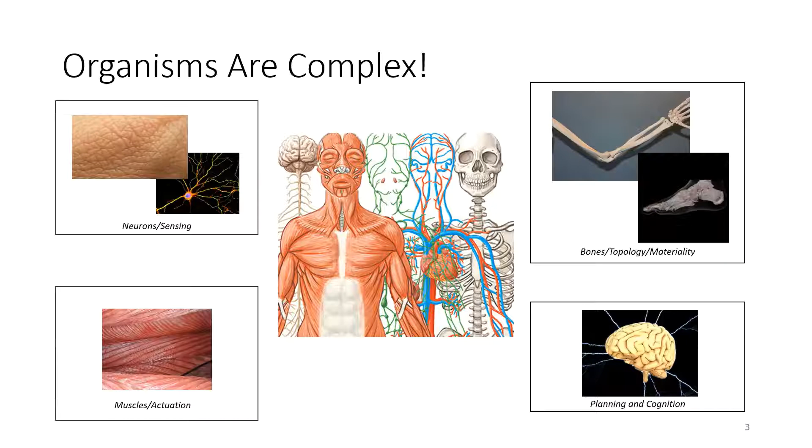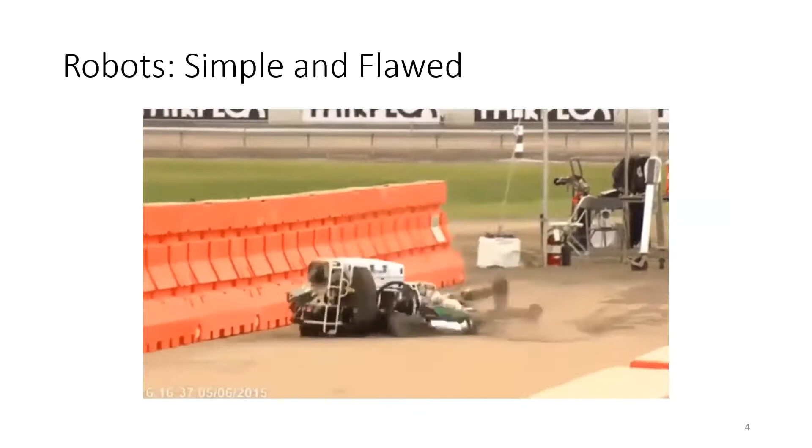Meanwhile, by contrast, this was the state of the art in robotics 6 years ago. And this was actually a huge win. I'm showing the failures here, but this was the DARPA Robotics Challenge where robots were able to solve a number of tasks. But here, if you look at all the different failures, you also see how much further there is to go. Robots fail on a lot of more simple tasks.

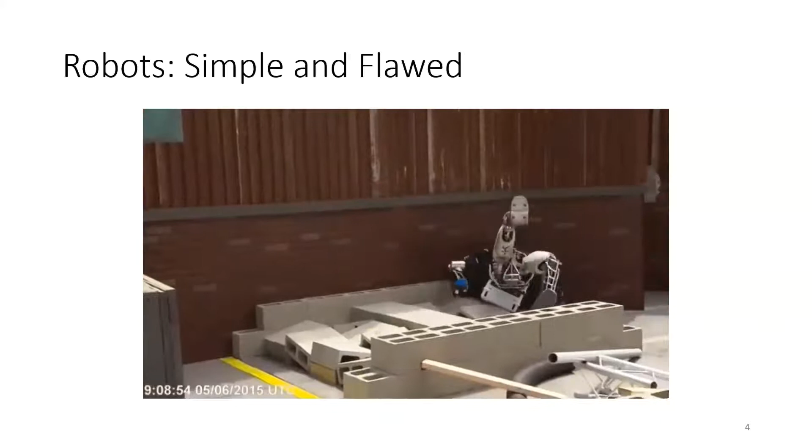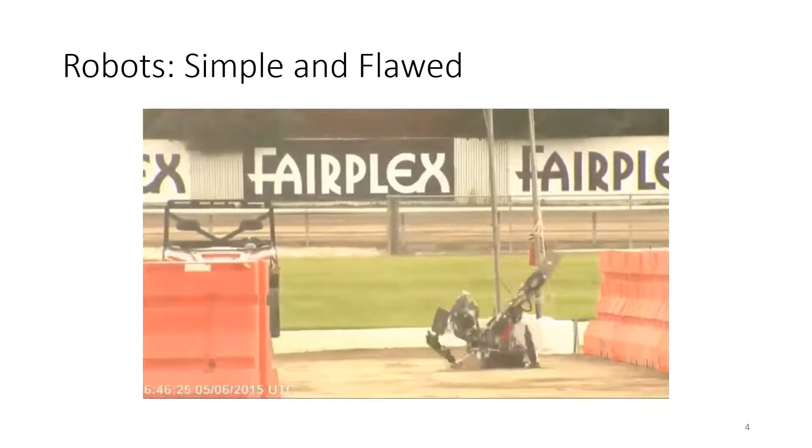And if you watch, this was a competition for humanoid robot designs, and you'll see that many different teams had their own robot design, but they all feel a little bit suboptimal here, right? There's no richness of the organ systems that you see in biology. They're a little bit rigid, they're a little bit clunky, they move funny, they have little integrated sensing. And part of that is because of the way in which they were designed.

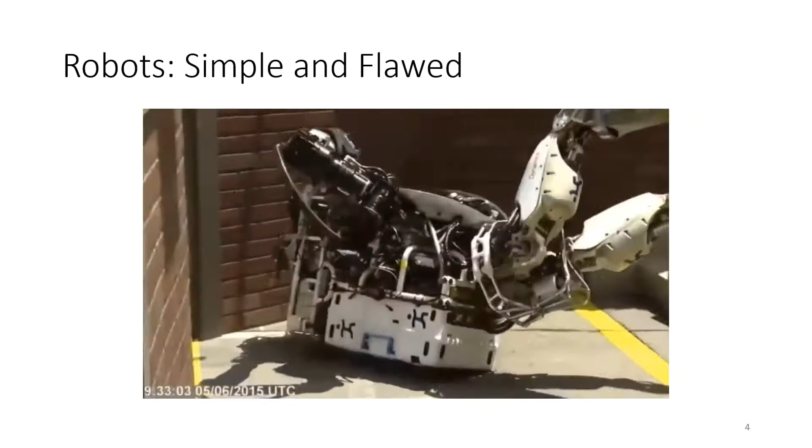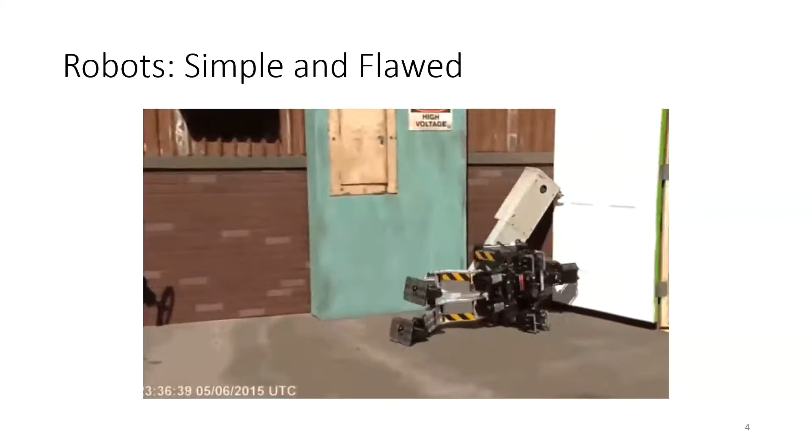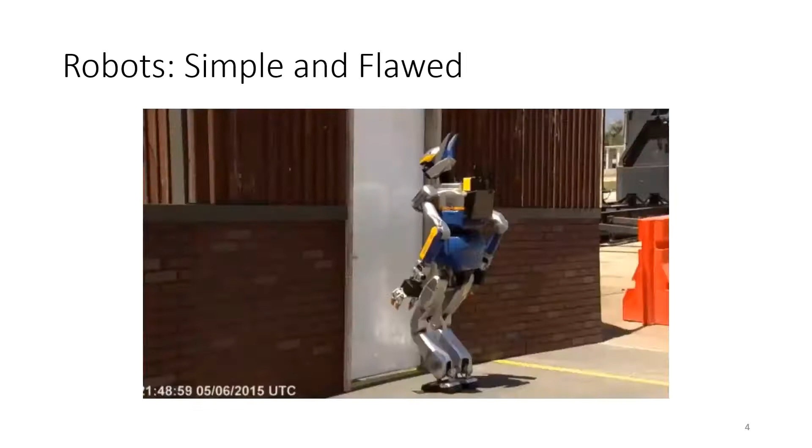These robots are really, really expensive. And once the body is built, the teams had to do the best that they could with the robot's morphology, hell or high water. I should also stress that these bodies weren't necessarily designed specifically for the tasks that they were meant to solve. They had to solve a number of tasks, and people were doing this mostly from a biomimetic standpoint.

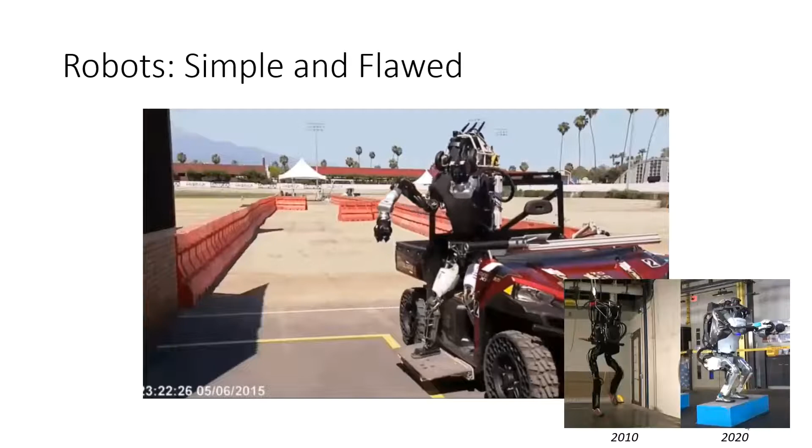I'd like to take this moment to make one more point. This on the bottom right here, this is Atlas. This is one of the robots that was used in the challenge. On the left, you see 10 years ago, and on the right, you see today. And if you've seen the videos from Boston Dynamics, you know just how far their humanoid robots have come in the last 10 years. But from another perspective, you can say it took 10 years to build something that still struggles to do everyday tasks, such as construction, cooking, etc.

And if design cycles are this slow, how many more decades is it going to take to get a diverse future of robotics?

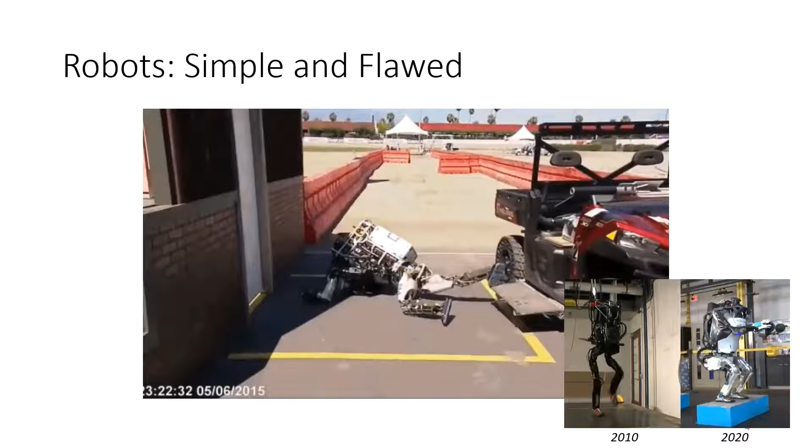So why did teams struggle so much in the DARPA Robotics Challenge when the robots failed? Well, as I hinted before, current workflows for robot design are extremely slow. And that's particularly because people are working on spiraling linear workflows.

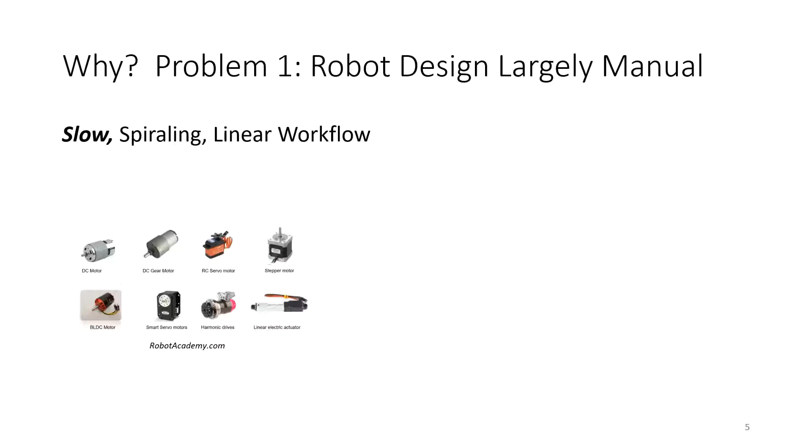And what I mean by that is that first a designer develops a conceptual design of how they want the robot to move. And based on that, they select the actuators they want to use for a task. Then they design the body to house those actuators and define concretely how the robot will move. And then they program it with control or higher level AI reasoning. And if they realize then that the robot is not performing as desired, they may need to revisit as early as actuator selection and repeat the process.

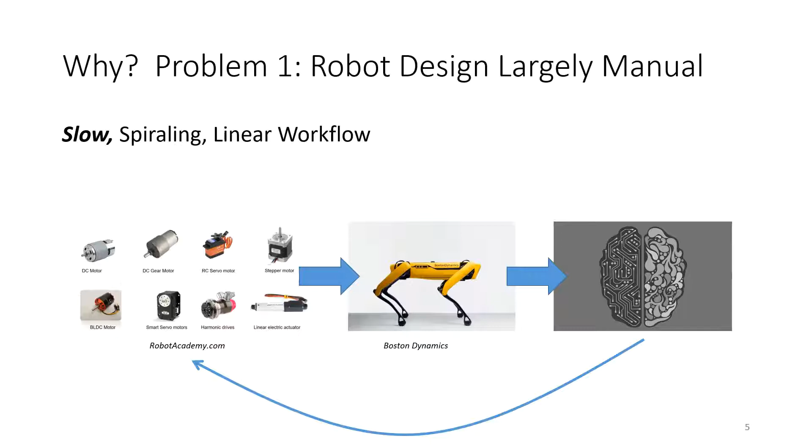This is slow, hardware intensive, and suboptimal. As a bit of a corollary of this, because mistakes are so expensive, designers tend to play it safe, and they stick to what works. Here's a handful of quadrupedal robots that have come out over the last few years, and it really does feel like every other month, somebody is releasing a new quadrupedal robot.

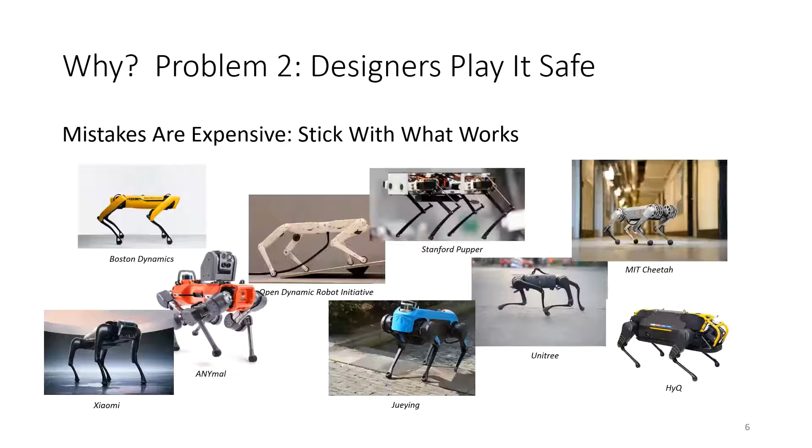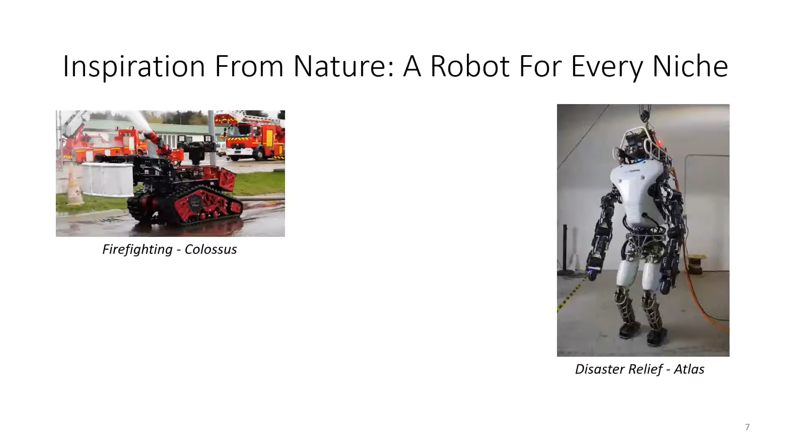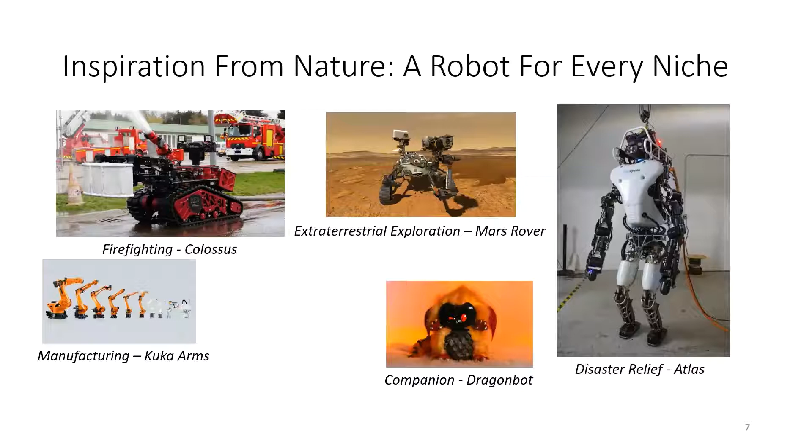And while this is cool, this isn't quite the diverse future of robotics that I was hoping to sign up for. The dream of a robot-filled future is one that takes inspiration from nature, where a robot fills every niche. And while we see some different morphologies that get some attention, some more than others, particularly humanoids and robot arms,

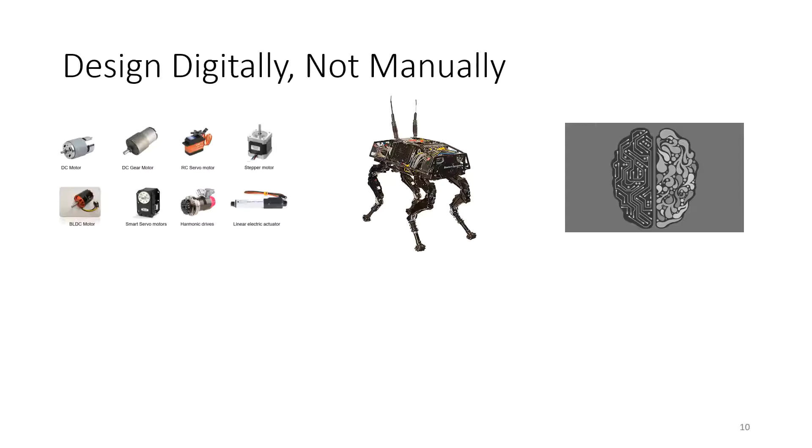My research, though, is specifically focused on developing a workflow where all aspects of a robot are co-designed and co-optimized at once to build a sophisticated robot that can solve specified tasks, such as robustly traversing uneven terrain. The thesis is this: algorithmic tools can be used to vastly accelerate the design and fabrication process of rigid and soft robots in a single CAD/CAM workflow by jointly reasoning about all aspects of robot design in a single physically predictive pipeline. Here's the view from 40,000 feet.

For the purposes of this defense, and the fact that I only have about an hour to talk to you all, I'm focusing on 4 main contributions of this talk. Each will add a new layer of complexity to the co-design tale, although each also brings its own unique contribution. We'll start by talking about how do we co-optimize robot shape, then materials and proprioceptive models very briefly, and then we'll end by talking about how do we optimize robot sensors.

But in every single one of these contributions, we're not just going to be optimizing over these one domains, but we're actually going to be adding other domains to the mix, so co-optimizing over things like control and motion and actuator selection.

These contributions have been solidified in 4 main papers that I'm going to talk about, and most of this work will be simulation-based, but with an emphasis on being physically accurate so that the robots designed by these algorithms may be fabricated in the hopefully near future. But I'll touch upon some fabrication results throughout this talk. So without further ado, let's get started.

And I'd like to start by actually going a little bit deeper into why co-optimization algorithms are necessary to begin with. I want you to look at this, this cartoon hexapod.

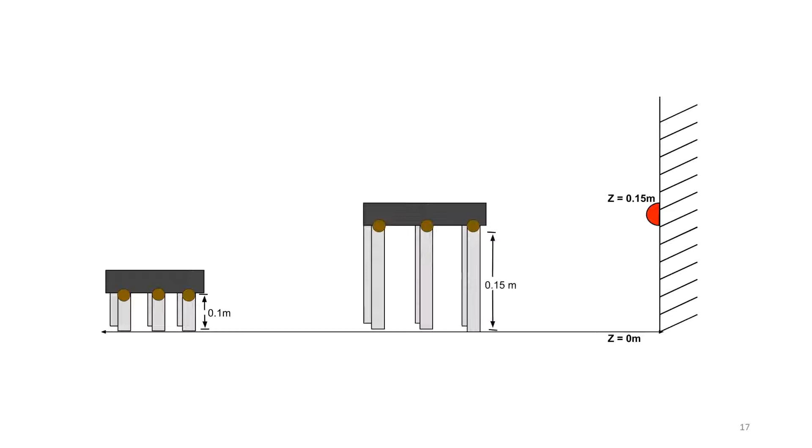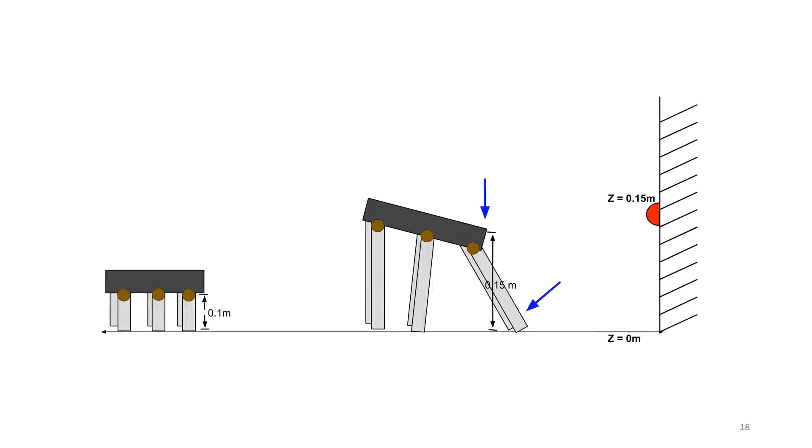But something happened when we made the robot taller: we've changed the dynamics of the robot. We've changed the forces that are going to be applied and the torques that are going to be applied due to the motors and by gravity. And not only did we change the dynamics of the system, but we also changed the kinematics as well. So the robot went from having a short stride to a much longer stride.

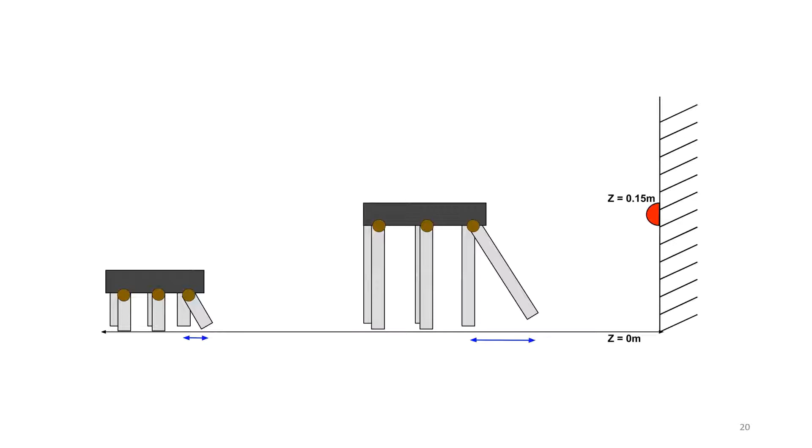And as you change the dynamics of the system, it means that necessarily you're going to have to revisit the control. If you change the control, you might need bigger or smaller actuators. If you change that, you might need a bigger body to house the actuators in. And this all leads back to our spiraling workflow.

So let's talk about our options when it comes to robot design. First, one of our options would be manual workflows. These are what we talked about before. They're slow, spiraling, expensive. We're not going to be about that in this talk.

Another option that we could have is alternating optimization. So this is very similar then to the manual workflow of that spiraling and expensive, but rather than manually going and designing each aspect of the robot and going back and then revisiting each aspect, we're going to computationally optimize each aspect. So we'll optimize control, and then we'll optimize the body shape, and then the actuators, and then we'll go back to control. This sounds like a pretty promising direction to go, but sometimes it leads to problems.

It can lead to poor local suboptima, since only certain bodies are compatible with certain controllers. So this is a little bit better, but I think we can do still even better.

The way we're going to focus on in this talk is full co-optimization, where we solve for the best body, controller, and actuator simultaneously in a single optimization workflow. But there's a challenge here, it's hard enough to solve motion, and now we're saying we want to solve for motion, control, and actuators.

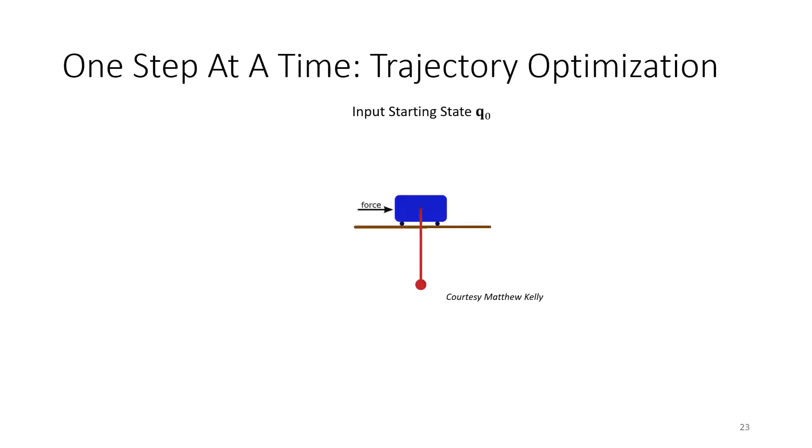Our solution is rooted in something called trajectory optimization, so I'll briefly review that now. Given a starting pose of a robot and a target pose you want it to reach, and maybe some constraints such as maximum actuation limits, trajectory optimization finds the actuation input for every time step such that when simulated, the robot reaches the goal. This is feasibility, can we find a path that reaches the goal, such as this cart pole swing up.

But sometimes you want to do a little bit better because there are lots of different trajectories which can solve a task. So you can also optimize over things like maximum power consumption of a motor, average power consumption, or maybe you just want to solve for feasibility. We can solve these problems more efficiently by converting them to the direct transcription form. I'm not going to focus on all the details here, but just note that we can solve even for things with contact.

The key to solving these types of problems is that we need to compute the gradients of all the constraints of the system, which means we need to compute gradients of the dynamics with respect to all of the decision variables. We need to determine the gradients of the dynamics, gradients of the contact constraints with all variables, and also reason about state and actuation. Algorithms for solving this are pretty well understood at this point for control.

What we proposed in this paper, our core contribution, was the realization that you can also add design variables into the trajectory optimization framework, which we call parametric trajectory optimization. This is possible because the dynamics and all the constraints of these problems are smooth and continuous in the space of design parameters, which makes that co-optimization solvable with gradient-based methods.

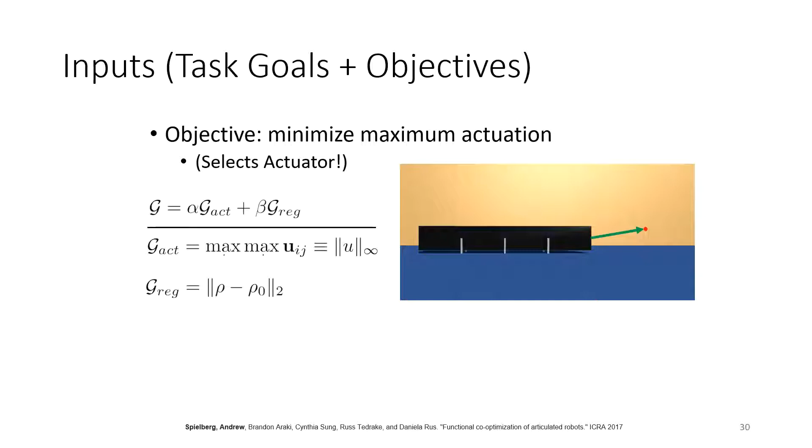We also have two objective functions which we add together. We try to minimize the maximum actuation, which is particularly nice because it allows us to choose the smallest actuators necessary. We also regularize this with respect to design parameters to keep it as close as possible to the designer's vision. As outputs to the system, you get an optimized robot morphology, an optimized robot controller, and it also selects the actuators via the objective function.

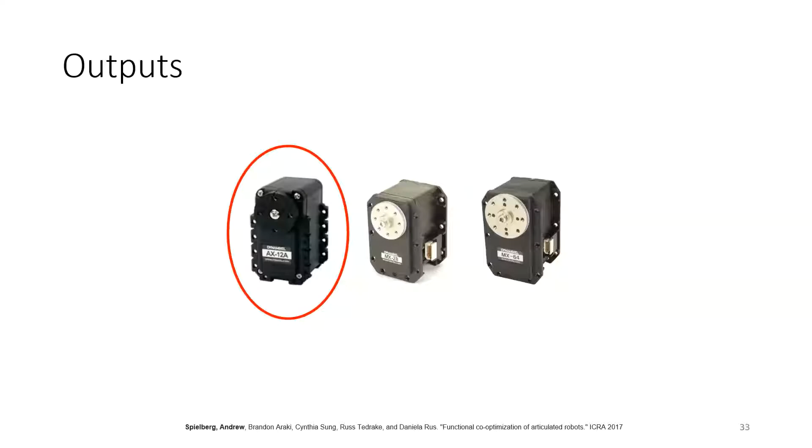So let's get to the fun results. In this example, we have a rigid hexapod that's going to try to hit a button that's too tall for it again.

In all the examples you're going to see here, the robot was actually unable to solve the problem in the default configuration. We always made the robot too short, or too heavy, or usually both.

Here you'll see a task where the robot clears the step, and actually there's only one configuration of the links that works here. The top links have to be shorter so that the robot can lift its leg and not collide with the step.

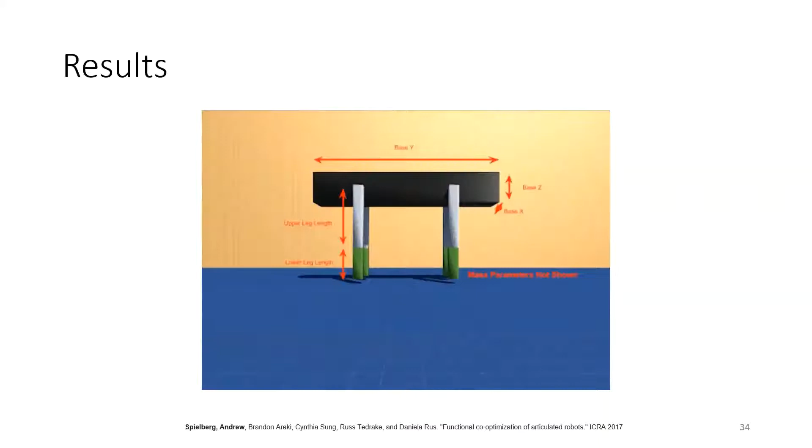Here's an example where we did a quadruped, and we'll optimize this over two objectives. First, energy efficiency, so we can choose the smallest actuators necessary.

In the second example, this is just the same video twice, just to show that we optimized it for a quickly moving gait.

Finally, in probably the most challenging example here, this is called either the scorpion or the squirrel, depending on what you see. We have two constraints: we want the tail to hit a certain point, and we want the front of the body to hit a certain point. We also put joint limits on the tail so that it can only bend a certain amount — I think it was like 60 degrees or something.

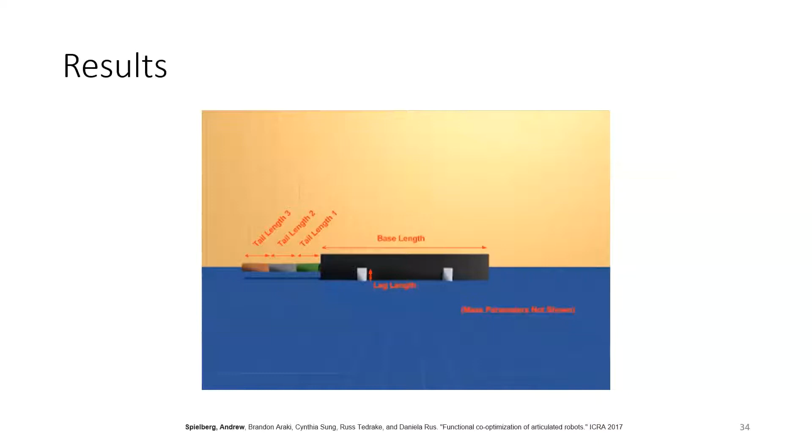There's actually only one configuration of the link lengths that can solve this task. So that was pretty exciting that it's able to find that.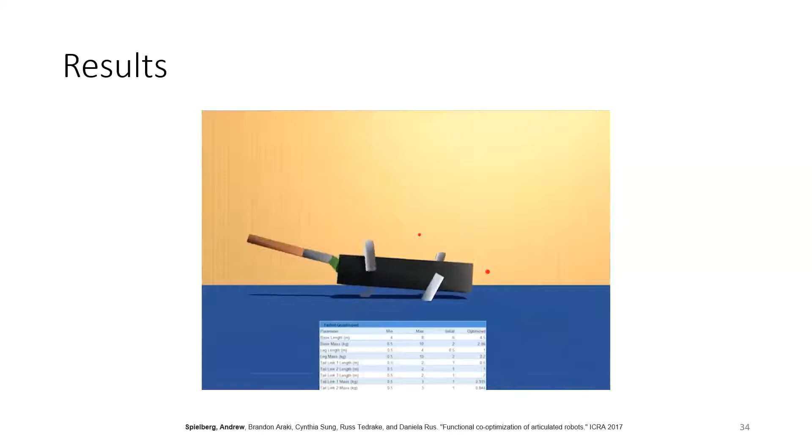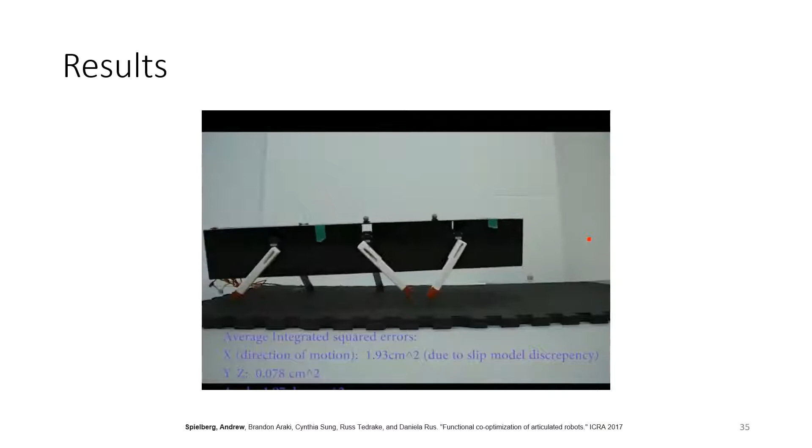So if you're the evil empire, you might want to optimize your AT-ATs to crush the rebel scum. One of the cool things here is that the AT-AT, as it's going up the ramp, wants to stand up.

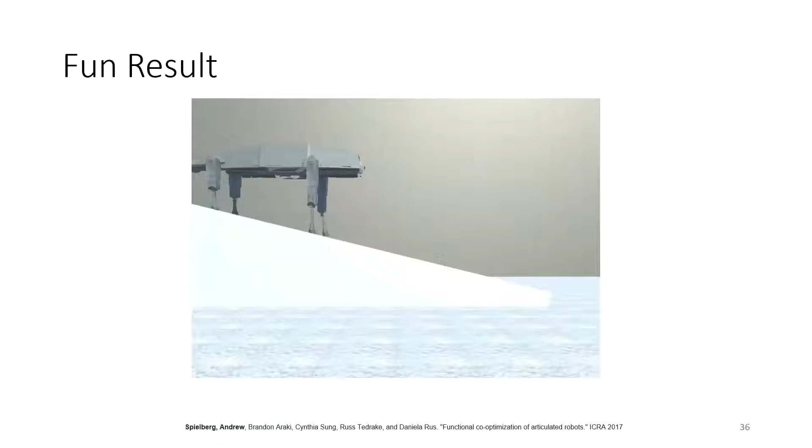So the solver actually optimized to find longer legs in the back and shorter legs in the front, so that it can still stand upright while it's on the ramp.

In conclusion, we're able to co-optimize over the skeleton, going back to our idea of optimizing these optimal organisms. We've shown that we're able to optimize over the parameters of a skeleton, control, and actuators. And design optimization can transform what are normally specified as infeasible problems into feasible ones.

This is made efficient through gradient-based methods, and here we specifically use symbolic differentiation. But nature isn't fully rigid, and compliance and elasticity are important features animals use to solve these tasks.

Which brings us to our second contribution, where we focus on materials and soft robotics, which have much richer dynamics and many more degrees of freedom than rigid robots, both for control and for design.

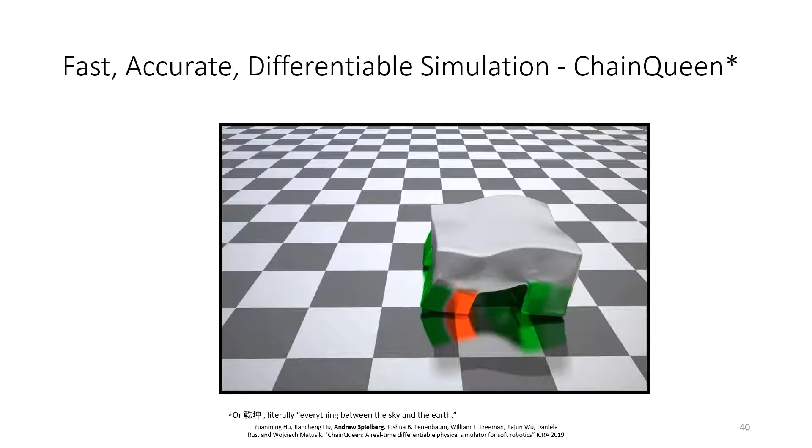Specifically, to solve this, we're going to present a fast, accurate, and differentiable simulator, which we call ChainQueen, meant for soft robotics. I want you to pay attention to that third word there: differentiable. What do I mean by differentiable simulation?

Simulation looks like this. A soft robot is inherently an infinite dimensional creature. If you take any soft object, a piece of elasticity, you can see that any point could theoretically be stretched in any direction. So any point in the body can deform in an infinite number of ways.

Rather than try to reason about this entire beast, we use what's called an observer function, where we feed a reduced state of the robot, a short summary, into a controller. For the purposes of what you're going to see here, the observer we use is just clusters of the soft robot, and we average their positions and velocities, feeding that in as a summary.

That summary can be fed into a closed loop controller, which generates an actuation signal based on the state, which can then be used in a forward simulation step. After stepping the system forward for the length of the simulation, we summarize the robot's behavior with a loss function, which we seek to optimize.

Example loss functions could be something like energy usage, which you saw previously. But for soft robots, we're actually going to do this in an unconstrained fashion — I can talk offline if you want to know why we choose unconstrained optimizers here. So our objective is usually going to be something like how far forward does the robot walk.

After we simulate forward, we perform what's called a backpropagation step, where we compute the gradients of the loss function by applying the chain rule recursively back to the start of simulation.

And then we feed those gradients into any first or second order optimizer. Now, part of what makes a simulation differentiable is that any variable of the system can be differentiated with respect to any other variable. Differentiable simulation is a bit more powerful than the symbolic gradients that I talked about earlier.

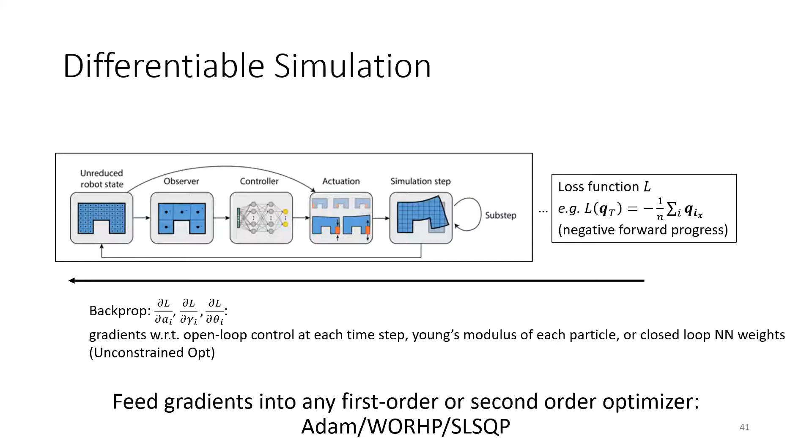Since differentiable simulation can have a more complex program structure, it can have things like if statements and for loops. Now, you may be wondering why I suddenly started talking about simulation. Well, it's because the differentiability of simulation is so important in solving soft robot co-optimization tasks. And also, we're going to be using this simulator for the remainder of the talk.

Now, I said that the simulator was differentiable, accurate, and fast. So why do you care? First of all, when you have differentiability, you have gradients. Like I said, you can use continuous optimization. And that really allows for some exciting applications in control, system identification, and design optimization.

Second, if it's accurate, it gives us promise that we can actually fabricate these robots in the future. And third, simulation is always the inner loop of any design algorithm. For each iteration of an optimization algorithm, you're always going to want to simulate your robot to see its performance and compute gradients in order to know how to update the system. So the faster you make the simulation and the gradient computation, the faster that you actually make your optimization algorithm.

Another thing people ask me is, why do we actually care about using differentiability for control? I've heard about this cool thing called reinforcement learning. Everybody's using it these days. Reinforcement learning is really powerful, especially for rigid robots.

But we've actually shown that if you use model-based differentiable simulation and use the gradients from that, it's possible that you can actually improve the robot up to 10 times faster for control than reinforcement learning. And even for situations where there's contact, it becomes even trickier. I'm yet to see that much research really showing that it's feasible to use reinforcement learning on walking soft robots.

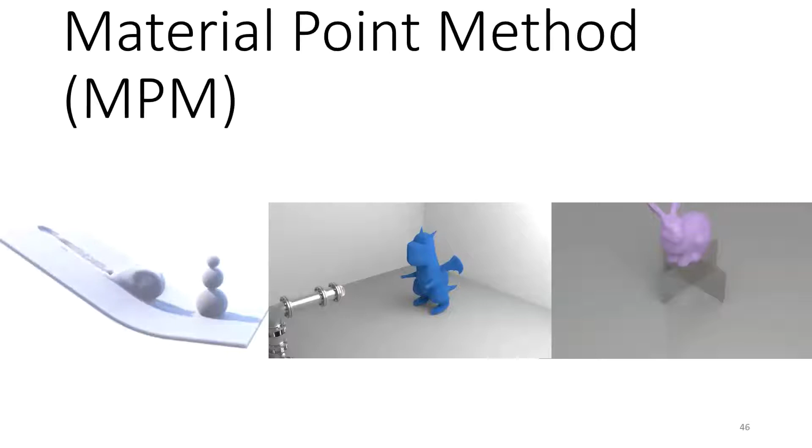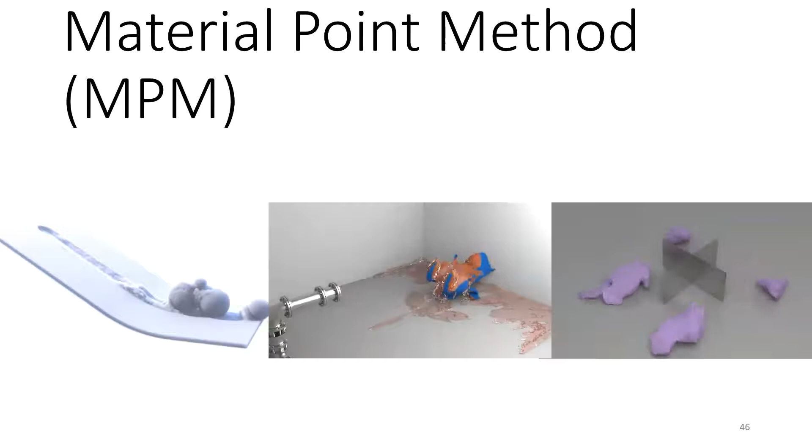by Disney. It can handle fluids and elastic coupling. It can even handle things like fracture, which is a feature or a bug, depending on how you think about it. And it's physically based, which makes it really perfect for soft robotics.

MPM is a hybrid particle grid simulation method. So particles are the main representation of the geometry, but for each time step, they're rasterized to a grid and advected. While on the grid, elastic forces are applied between neighboring grid cells, momentum is updated, contacts and collisions are resolved, and then the system is resampled in its particle form and is advected forward in time.

Most of the time throughout this talk, you only have to think about this as a collection of particles, as if these are the atoms that are making up an elastic body, but occasionally we'll talk about the grids.

Now, MPM by itself isn't new, but what we've done here is we've added the ability to compute gradients of any output of a simulation step with respect to any input, and we put it on the GPU to make it very efficient. And obviously, the idea of differentiability isn't completely new.

For people in the audience who are familiar with deep learning, differentiability is what powers these learning systems today. And if you are familiar with deep learning, you can think of a single step of simulation as you would a single layer of a neural network. In this sense, a differentiable simulation is really just a highly nonlinear deep neural network.

Okay, now let's get to the demonstrations. As a first motivating example, we're going to show how gradients can be used to infer physical quantities. So here, ball A will collide into ball B, and we want ball B to land at destination C. This is going to be, where the ball lands is going to be a consequence of momentum and conservation of momentum. So we define a loss function, which is how far does the ball end from the observed destination?

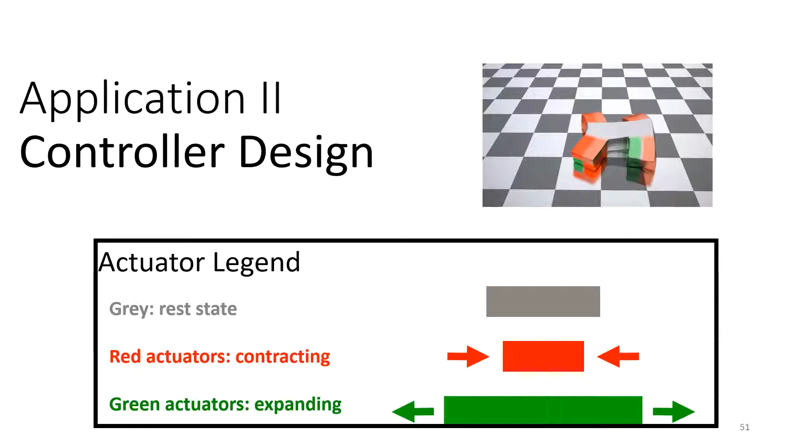In this example, we're using pneumatic actuators, where the red actuators are currently contracting and the green ones are currently expanding.

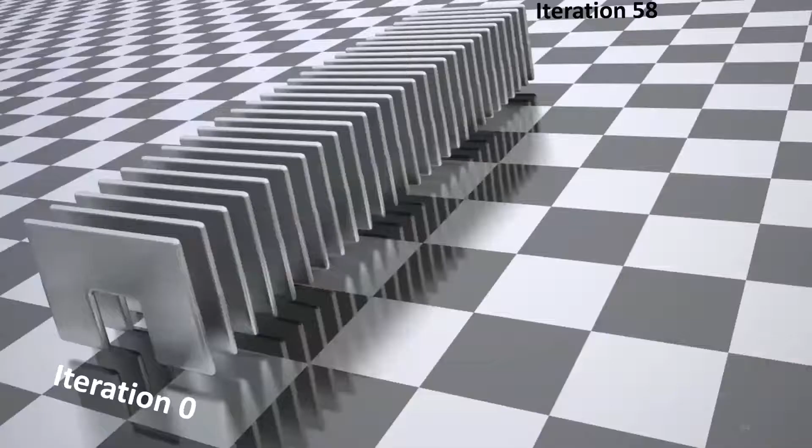First we'll optimize this 2D biped runner. It has 4 actuators, and the goal is to move to the right as quickly as possible. Over 58 iterations, the robot learns to walk forward just by using vanilla gradient descent on the computed gradients.

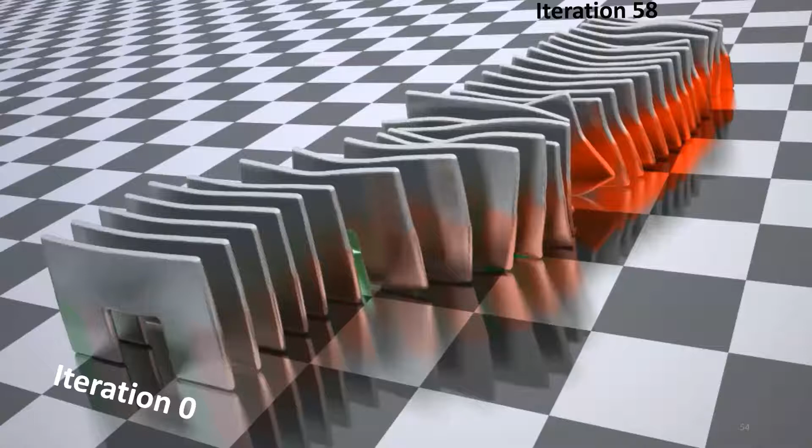This is a pretty exciting result because this system is pretty complex. The system has thousands of degrees of freedom, and we can do this very quickly. Each simulation and gradient computation can be done in less than a second, so we can optimize this entire motion in less than a minute.

We can actually do better than 58 iterations. This was using vanilla gradient descent, but if you use something like Adam, which is a little bit smarter, you can do this in 10 to 20 iterations. So really fast control optimization.

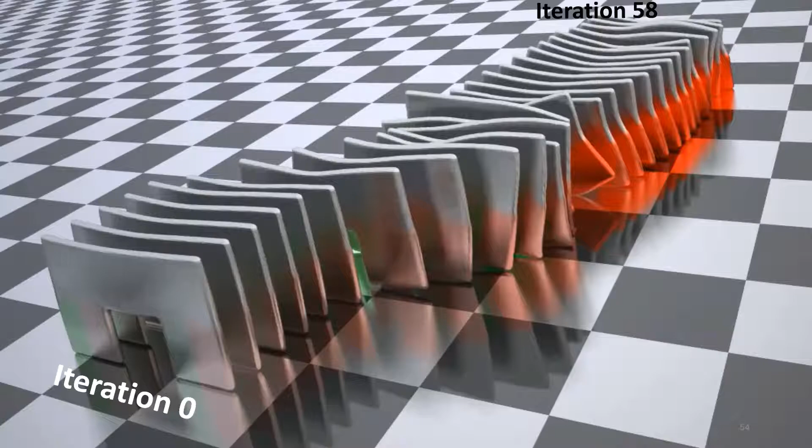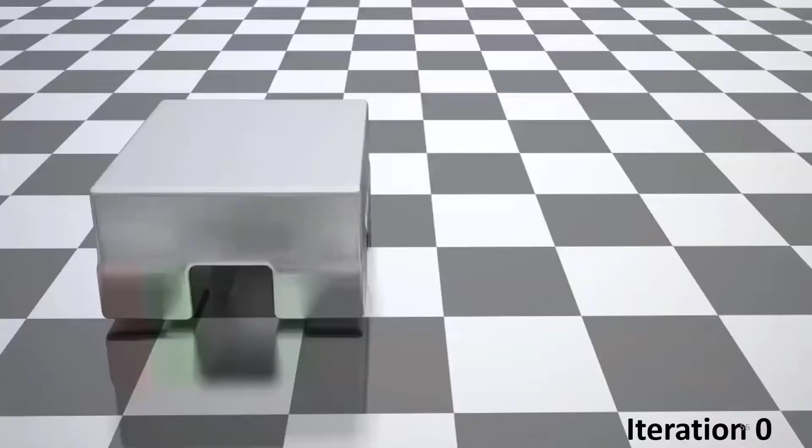Maybe a little bit more realistic is 3D. Here's that quadruped you saw earlier, with 4 actuators in each leg. You'll see that it's able to optimize its control by vanilla gradient descent.

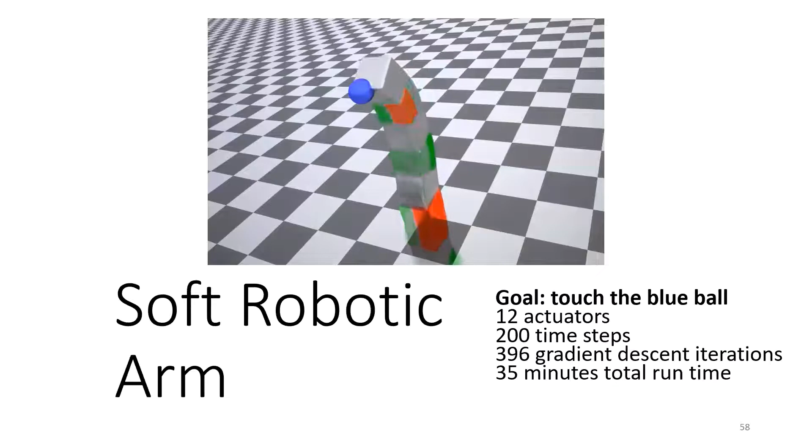We don't have to just do walking. We can also do a soft robotic arm where we make the objective the distance to this blue sphere. This is a multitask example, so the controller that's learned is general. You just say where you want the sphere to be, and no matter where you put it, the robot will optimize to hit the sphere.

A lot of people ask me, are you stuck with blocky geometry? Can you do things other than blocky geometry? And the answer is yes. So for the Pokemon fans in the room, here's Bulbasaur. It's going to learn Tackle Attack in 100 iterations or less.

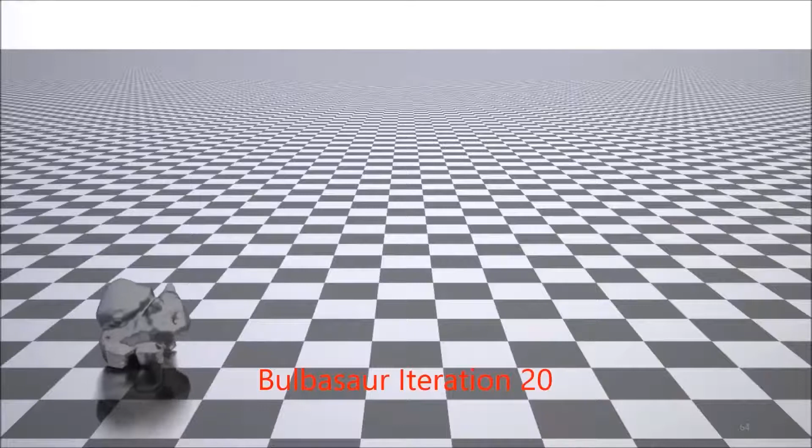You can just input a mesh into the system as we've designed it, and it'll add the particles automatically. All you have to specify is where the actuators are, and the robot will learn to hop forward.

That's enough for control, but now what we're really excited about in this talk is co-optimization. So the question is, can we co-optimize soft robots? One of the most powerful aspects of differentiable simulation is that anything can be differentiated with respect to anything else in the simulator.

We can differentiate with respect to closed loop control parameters, open loop control parameters, or really excitingly, the material properties of every single particle in the system — that's the Young's modulus, or stiffness, the Poisson's ratio, or compressibility, and the density of every single particle.

This can create soft robots with spatially varying materials, which hopefully someday can be realized by something like voxel-based 3D printing or metamaterials. That's potentially thousands of controller parameters and potentially hundreds of thousands of material parameters.

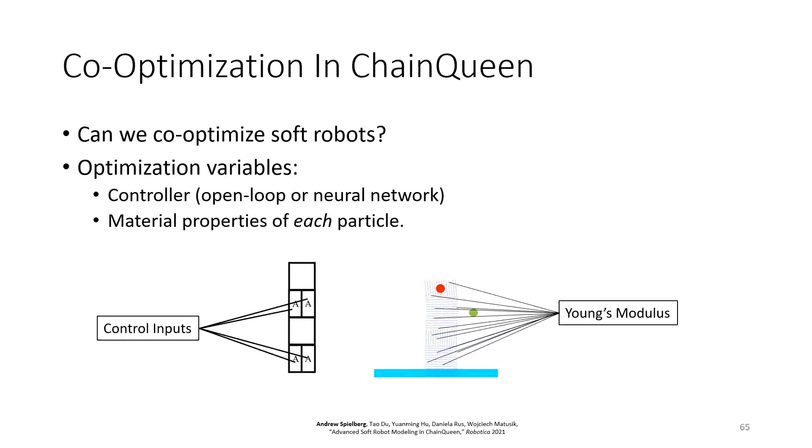This arm is going to have to learn two things: one, an actuation sequence where it oscillates back and forth so it can build up enough momentum to hit the green circle, and also a material distribution that allows it to hit this with optimal efficiency.

Here's the results from our optimization procedure, and you'll see something really nice emerges. The red sphere gets pretty close to the green sphere at the end, much closer than in the default configuration where it's unable to move back and forth at all.

The really nice thing here is that we see the soft material aligns itself on the outer spine of the arm, which is the part that's going to stretch the most, so that's the part that needs to be the softest. This is a really intuitive and exciting result.

We can also do this for walking robots. These are examples optimized using the Adam optimizer. I'll show you a biped and a quadruped. As you watch this, you'll see that the material distributions optimize over all the different parameters, in a way that allows the robot to walk forward with a harmonic oscillatory pattern that's extra efficient.

Now, one thing you're probably asking yourself, or asking me, is what's the point? Does this help? Why would I do this? And the answer to that is a resounding yes. Optimization actually improves with every new variable, every new design domain that we add to this.

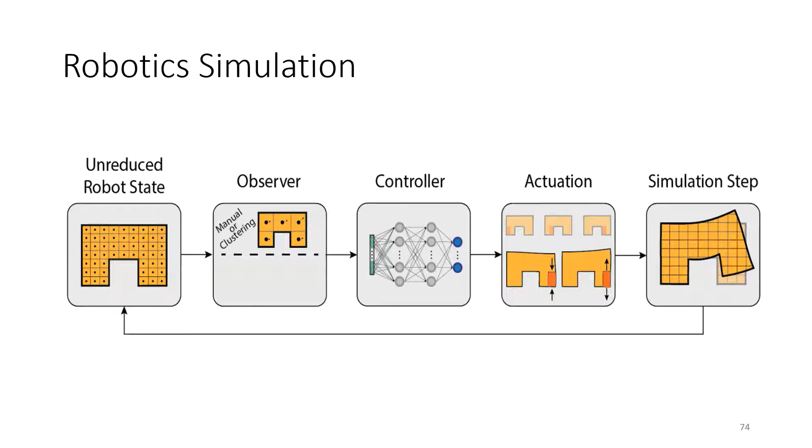But in the ChainQueen work, we just sort of clustered groups of particles and extracted features from them. This has two problems: first, that's kind of an ad hoc process that can require human tweaking, and it's not really physically measurable. As a solution, we presented a method for simultaneously learning an observer function with a descriptive latent space, at the same time that we co-optimize our robots over control and/or spatially varying materials.

You can imagine, in order to do this, we're going to imagine an external camera model, basically, that's going to look at the robot as it moves. This transforms this manual workflow into one that is automatic and learned.

Now, the secret sauce to making this happen is that MPM also occurs on a grid, not just a particle representation. Previously, I haven't talked too much about that grid, but it actually stores momentum and velocity information on how the robot is moving.

So you can sort of imagine these grids are like images, where the red channel stores how much the robot is moving in X, and the blue channel stores how much the robot is moving in Y. We don't really need a green channel for this.

The nice thing about it being grid and image-like is that it's the perfect data structure to be interpreted by deep convolutional neural networks. Further, these deep learning architectures are completely differentiable as well, so we can backprop through simulation, which includes backpropagating through the controllers and the learned observer function.

The algorithm we use to optimize this has two alternating phases, one of those alternating optimization algorithms I mentioned previously, and I'll explain why in a minute. In the first phase, the observer is fixed, and we use the gradients from a differentiable simulator in order to optimize the controller, just as we did before. But one of the core insights of this paper is that this procedure actually wastes a lot of information.

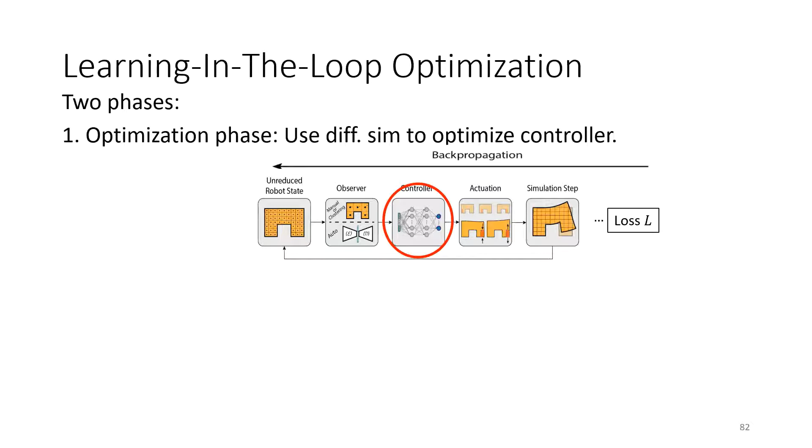We're using the gradients, and we're throwing out everything else about the simulation, the trajectory of the robot, the path, how it got there. Our realization is that you can actually store the frames of the simulation in memory, in a replay buffer, and use this in a learning phase, which we interleave with the optimization. It's a way to add much greater data efficiency in an optimization algorithm.

In this learning phase, we use the saved frames to learn an encoder via a variational autoencoder framework, which serves as an observer for a very descriptive latent space.

Now, some considerations here. Why did we have to use an alternating optimization framework? Well, we couldn't simply co-learn the encoder during the backpropagation phase, is what we found. The encoder learns too slowly, and the controller tends to get stuck in poor local minima as a result. We also had to store some extra grid frames in a replay buffer to improve the training stability.

We also use target networks, which is a trick from another paper called Deep Deterministic Policy Gradients, and a few other papers. This improves training stability.

The learned representations actually lead to much better controller convergence and much better design convergence than if you don't use the learned observer. That's because the observer function isn't this ad hoc clustering method, but it's actually something catered to the observed dynamics that emerge over control optimization and also design optimization. And the latent representations are actually pretty meaningful.

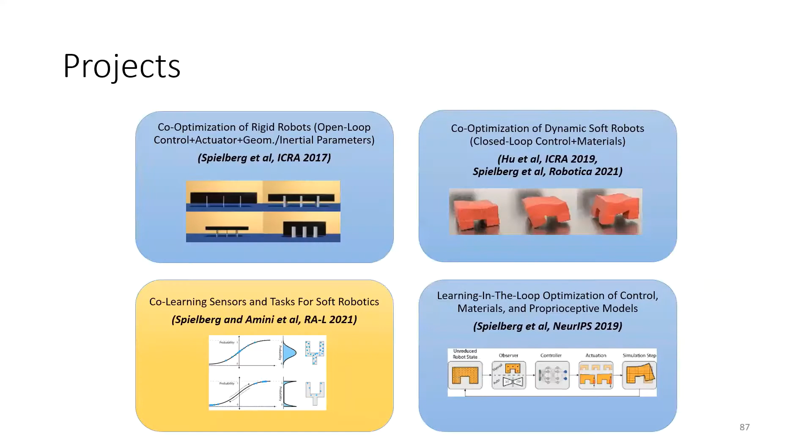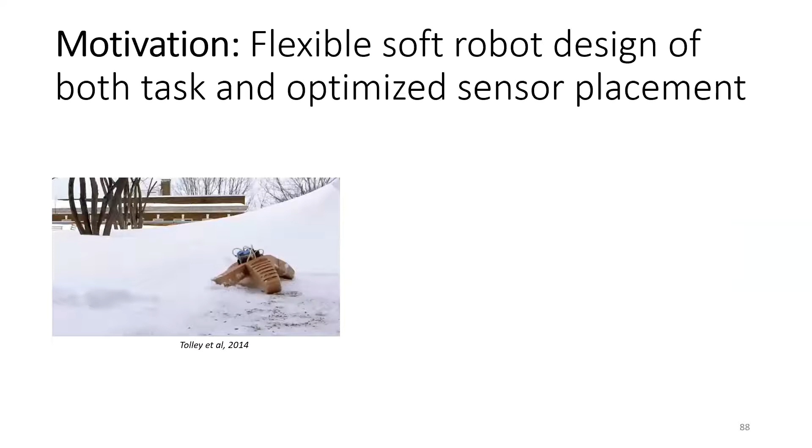Can we learn the sensor structure? That's going to lead us to the final part of this talk, which is co-learning sensors and tasks for soft robotics. Now, like I said, if we want to control these soft robots in the real world, instrumenting the whole world with extrinsic sensors, such as cameras or mocap devices, is pretty impractical for obvious reasons.

But luckily, in recent years, we've seen incredible breakthroughs in strain sensing from soft robotics. But embedding such of these sensors into robots can be complex. It can be time intensive, it can be expensive. And the decision of where to put these sensors is also a manual, human-driven process.

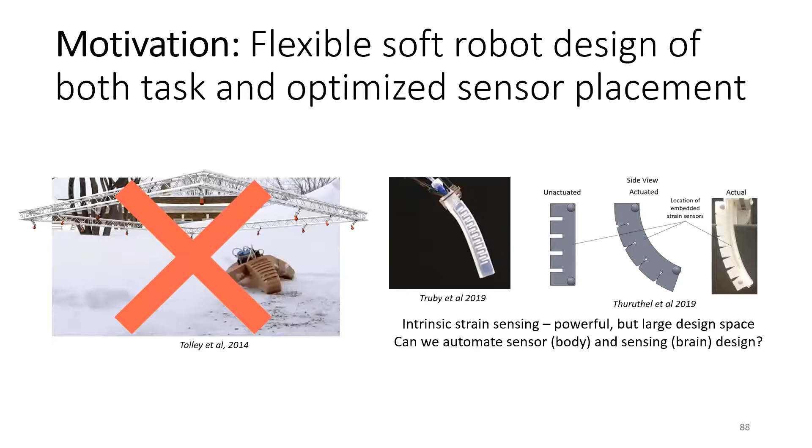But something I'm going to show you guys a little bit later is that humans are actually quite bad at sensor placement. In this project, we presented a method for simultaneously solving two deeply coupled problems.

The first problem: how do we solve soft robotic tasks purely from strain sensor information? For example, here you see a gripper manipulating an unknown shape, and from a time series of just the measured strain and strain rates experienced throughout the gripper, the problem in this example is to determine the shape of the object being grasped.

Now, of course, we can't measure the strains everywhere on the gripper, only at sensor locations, which we have to strategically place. So the second problem that we co-solve then becomes, given a budget for a maximum number of sensors we want to place on the gripper, where do we place them in order to get the most bang for our buck? What sensor placements lead to the best performance of the task at hand?

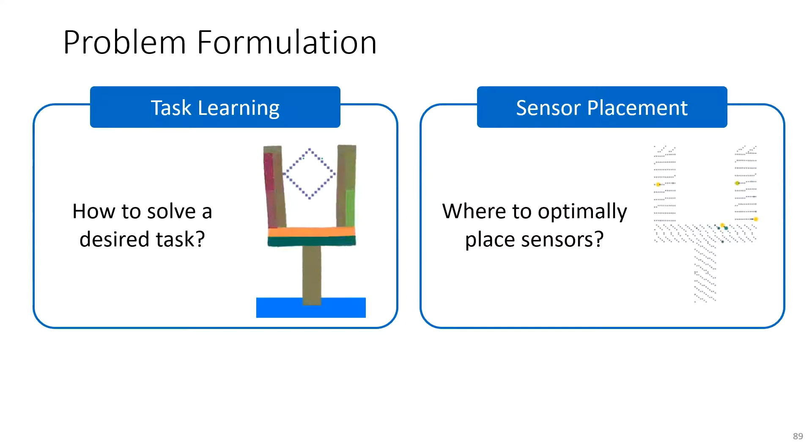Our solution is going to be to take a novel machine learning approach to this problem, and from data simultaneously learn a model for solving a given task while co-designing for intrinsic sensor placement. We'll use a new deep learning architecture that can be used in both aspects of this project simultaneously. What separates our method from other work is its generality.

We're going to show you results on 3 to 4 tasks, depending on how you count, and 7 different robot morphologies, 4 in 2D and 3 in 3D. The secret sauce is our deep learning architecture, the point sparsifier and feature extractor, which can be composed with other off-the-shelf machine learning models to solve all sorts of problems.

So for example, we can combine the PSFE with 2 other well-understood machine learning models, an LSTM and a predictor layer, to solve supervised time series learning tasks, such as determining the stiffness or shape of a grasped object. A second application is state reconstruction for soft robots.

From just the measured strains and strain rates, we are able to determine the robot's state in the world, that's its deformation and its deformation rate. And I want to stress that this works in both 2D and in 3D.

Finally, we demonstrate that representations learned for pose reconstruction can also be used for closed-loop terrestrial soft robot control. I should stress that we actually only tried these 3 applications because they were the ones we were most interested in. So really, there could be all sorts of tasks that our model could help solve, and we just haven't tried it yet.

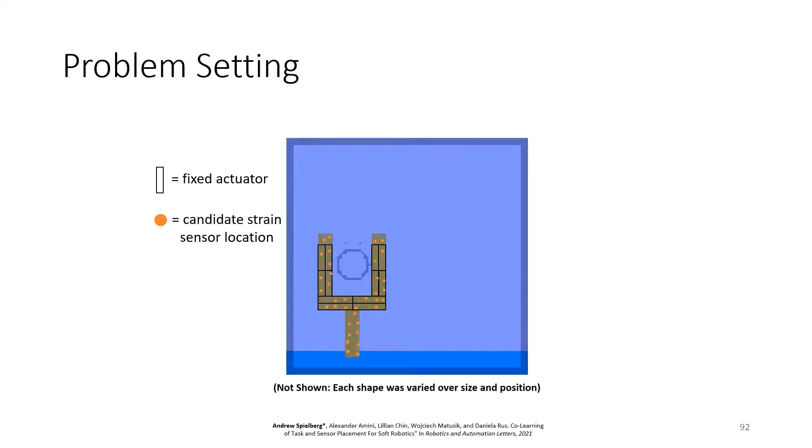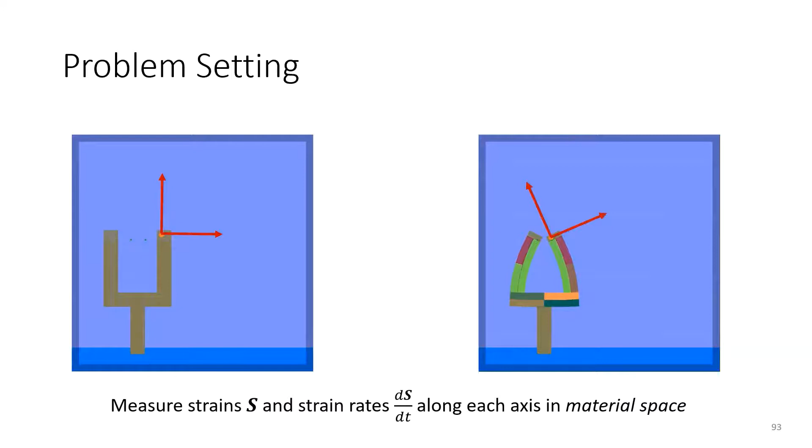Secondly, each sensor measures 4 pieces of information in 2D, or 6 pieces of information in 3D. That's the strains and the strain rates on the Cartesian axes and in material space. And by material space, I mean that as the soft robot deforms, the measured directions deform with it as you would physically expect.

In this work, we're working purely in simulation, but we've made deliberate steps to design our method such that it could be applied to real physical systems, right? We're using the physically based elastic simulation that we talked about earlier. We measure strains in material space. We've made sure our method is robust to noise and so on. The vision is that you would design your model in simulation and you would deploy on corresponding real world hardware.

The 2 main assumptions we make are that we have no sensing latency and that sensors are small enough to fit on nodes in simulation. We choose the material point method, or MPM, as a simulation method, but that's just an engineering choice. So the method is applicable to any node-based method, such as FEM, SPH. It's not simulation dependent. All these would work.

Finally, I won't talk about it too much here, but we performed a suite of experiments where we injected 1% sensor noise, which is more than you would find on off-the-shelf strain sensors. And our method works almost as well as with no noise. So this is a real data sheet of a real strain sensor. It has 0.65% accuracy error. So we are accurate to robust to real world tolerances.

Okay, so I've talked up the PSFE architecture. So what is it? I think there are 2 big ideas in this paper. So here's the first. Most simulation methods treat soft robots as collections of nodes. Because of this, we make the realization that, much like how we used the grid before, you can think of each time step in a soft body simulation as being a point cloud.

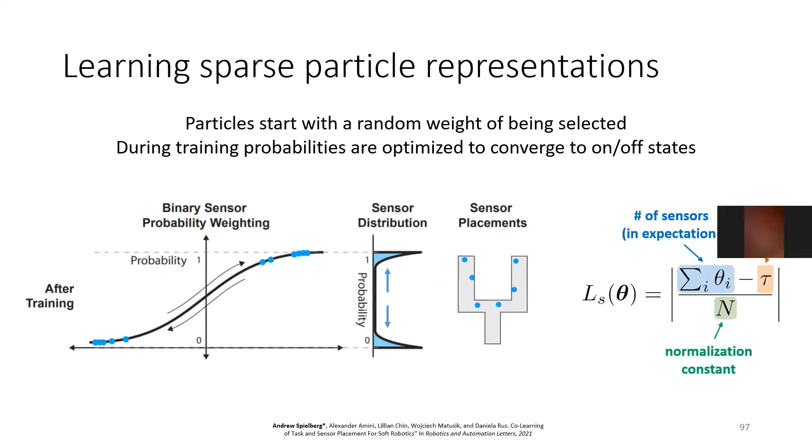The full algorithm is as follows. First, offline, we generate an entire data set of several simulations in different scenarios and record the strains, strain rates, and rest geometry of the robot, and any prediction labels. Then iteratively, we do the following 3 tasks.

We first use the data to compute how good our model performs on such task losses as how accurately it can predict the shape from a collection of different shapes. Then we compute the gradients of the model parameters with respect to task loss using a backpropagation scheme. We have to take care here to compute the gradients because they're stochastic, so we have to compute gradients that work in expectation.

Finally, we use these gradients to perform stochastic gradient descent, and we do 2 rounds of training, one where we treat the nodes as stochastic, and then when they get close to converging, we clamp them to 0, 1 in a fine-tuning step.

Now for the fun results. In this example, the gripper must disambiguate between a circle, a diamond, a triangle, and no shape, meaning no object being placed there. We build the data set by sampling these shapes in many different sizes and positions and add actuator noise in order to make the problem harder.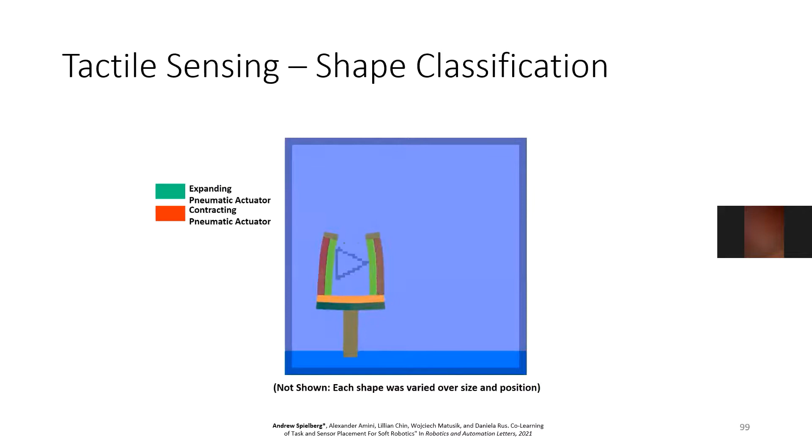So the model must learn to disambiguate the quality of the motion and can't memorize motion sequences. This is the confusion matrix of the trained model on our test data set. As you can see, we're able to get over 95% accuracy with just 5 learned sensor placements.

Strikingly, we compared to a baseline where we placed sensors in random locations, and it was unable to solve this task at all. Training actually fails, showing that sensor placement and co-training is important. By the way, in the paper, you can find comparisons to the random baselines for all tasks, and our method wins throughout the board.

Here's a visualization of the learned sensor locations, and you'll see they make semantic sense. They tend to appear near the inside of the gripper, which is what's interacting with the environment the most, and they barely appear on the stem.

PowerPoint tends to fail me exactly on this slide, and I have to restart it. Yep, okay, one second. I don't know why this happens, but I think that the future of HCI might be making PowerPoint that works. This is a very open problem, as you can see. I hope that everybody can still see this. Okay. Nice. Okay.

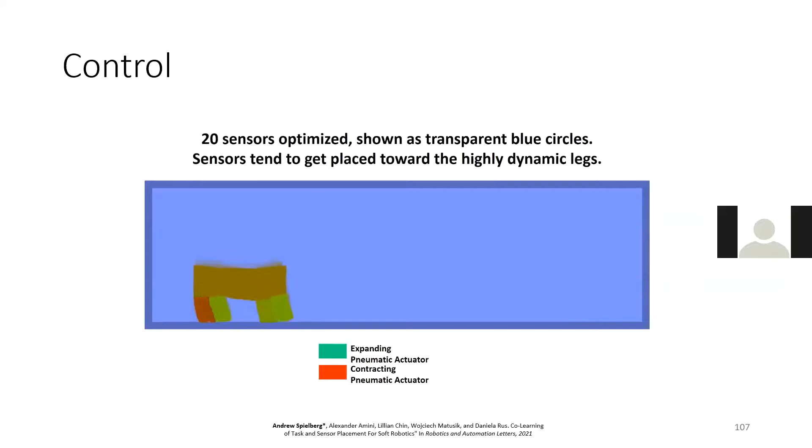This needed more sensors to be consistent and reliable. I think we used 15 or 20 here, but I think this is the first demonstration of closed-loop terrestrial soft robot locomotion, even from sparse intrinsic strain inputs, even in simulation. So this is all being controlled from strain inputs.

People ask me, can we actually fabricate these things at some point in the future? Looking forward, I'm really excited about fabricating these optimized sensor layouts, and I'm especially bullish on textiles as a sensing medium for soft robotics. Here you can see a quick demo of a textile-based glove that can reconstruct wearer's pose with state-of-the-art accuracy.

And you can imagine a bunch of maybe cool AR or VR applications here. This is powered by a novel fluidic sensing and resistive sensing architecture that reasons about forces and strains, and it's interpreted by a downstream neural network, much like in our simulated case. Right now we've placed these sensors down manually, but I'm really interested in automating their placement. There's all sorts of stimuli that this sort of sensing architecture can actually sense.

So you can imagine some really interesting applications. This is sort of moving us towards optimizing these soft robotic organisms with optimized robot skin, going back to our organ metaphor. So to summarize, I'm really hoping that computational robot design is going to be a force multiplier for the field, right? Transforming these spiraling workflows that iterate between the different domains into one that is not just the computer taking over, but rather the human working with the computer in order to design the robot.

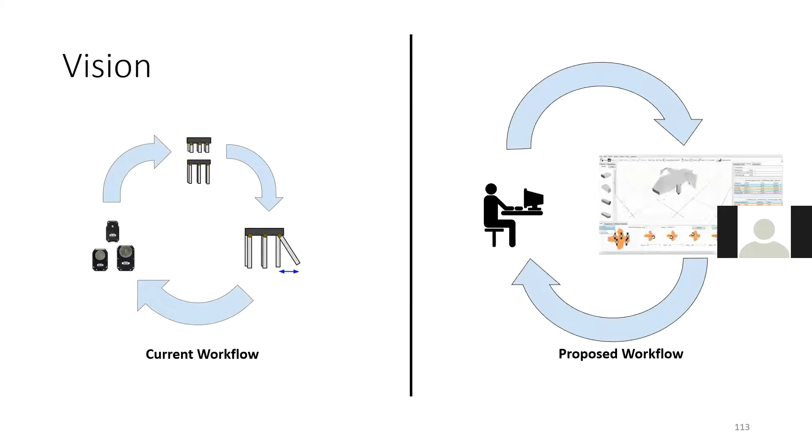The computer maybe explores different designs, it optimizes, it plays around in its own imagination, and it sends some ideas back to the human. And the human then looks at these results. The human then, based on that, can refine what they want, their conceptual design, their constraints that they want to put on this, the objectives that they want the computer to optimize, and sends it back to the computer. And this sort of becomes a dance back and forth.

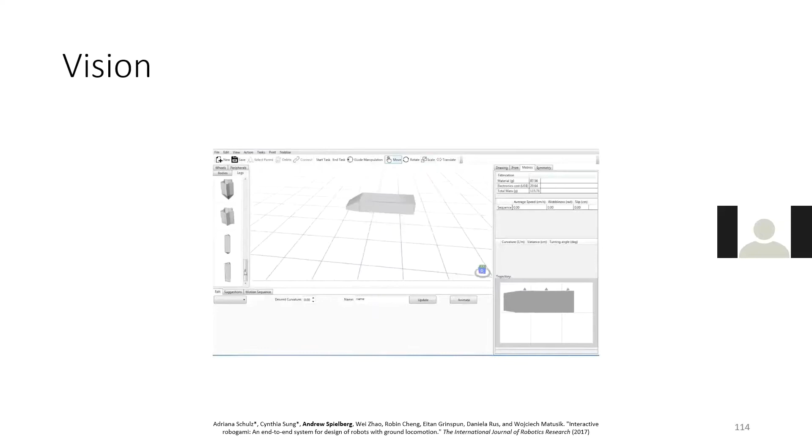This was all tied together. The first project that I worked on during my PhD, or thesis, was this composition-based program called Interactive Robogami. And while it only works on kinematics, it captures a lot of this in its form, right? And you see it's able to resize the different aspects of the robot to match user intent.

It allows users to explore different control sequences and play around with different types of motions, and interactively gives them previews of how the robot's going to move. And what you'll also see here is that it also allows users to play around with what the different parameters of the system will be, and it guides them in the optimization.

So it's interactive. You'll see there's little arrows here that appear that tell the user how to change the parameters of the system for optimal performance. And if you want, you can have the computer take over. You can hit a button and it'll optimize for like how fast the robot can walk forward, or you can do it in this interactive fashion.

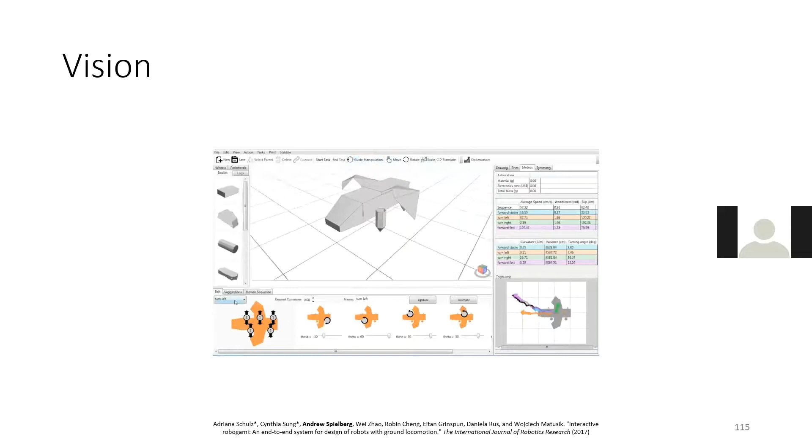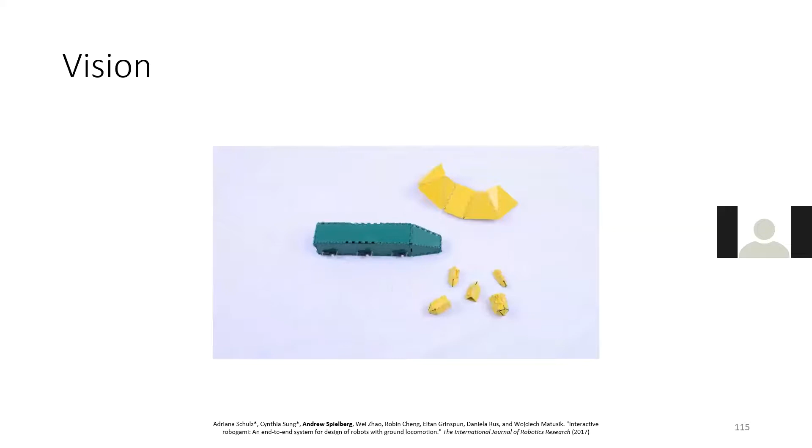And this whole workflow is tied together by not only this CAD procedure, but also a computer-aided manufacturing procedure where we export the designs to a 3D printer. They can be fabricated and they match what humans are able to, what humans see in the previews. These are the types of workflows where you need to be moving towards, and I'm hoping that the types of optimization algorithms that I showed today could be integrated into workflows like these.

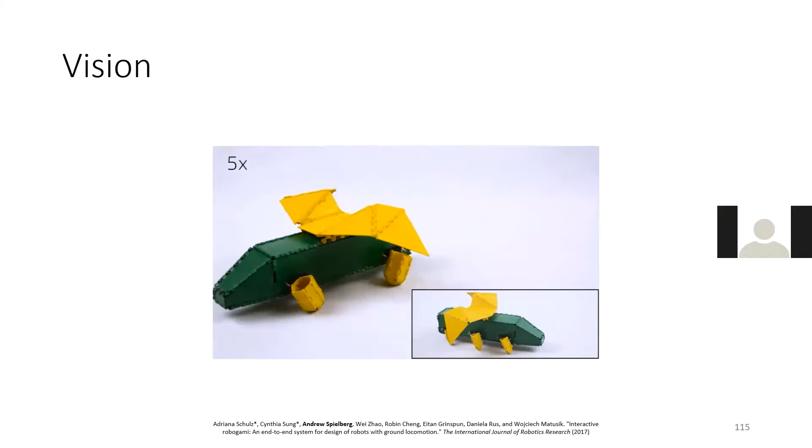As far as impact, I'm hoping that this work will really speed up the depth of the designs, right? Speed up the design process, maybe make it 10 times faster for engineers to design robots, and also the breadth of the different designs here, right? We want new novel morphologies and behaviors that we maybe wouldn't have explored as humans. We want computers to help us in this exploration process.

We had this big idea at the beginning of this talk that we wanted to do full co-design. We wanted to optimize for sensible skins. We wanted to optimize for sensor placement. We wanted to optimize for bones, materiality, actuator placement, and central cognition. And we've optimized over each of these domains along with some brain components, some controller.

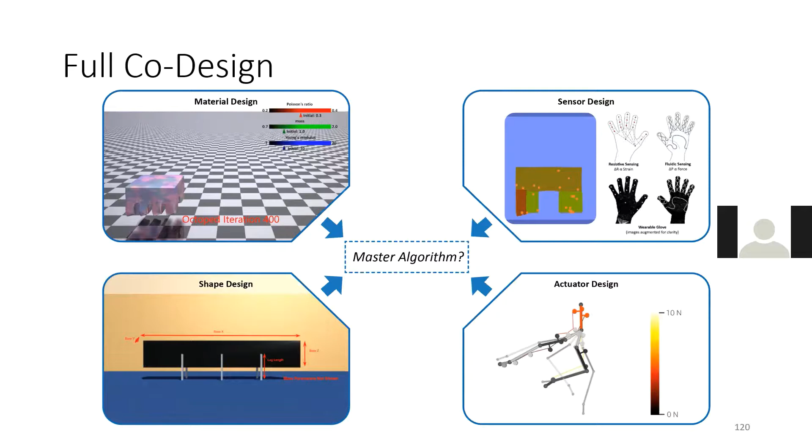But what we really want to do in the future is optimize for all these simultaneously in one grandmaster algorithm, including things I didn't have time to talk about today, such as tendon-driven actuator designs which match muscles. We want to optimize over all these different organ systems at once, and hopefully build robots that can approach the harmony we see in nature.

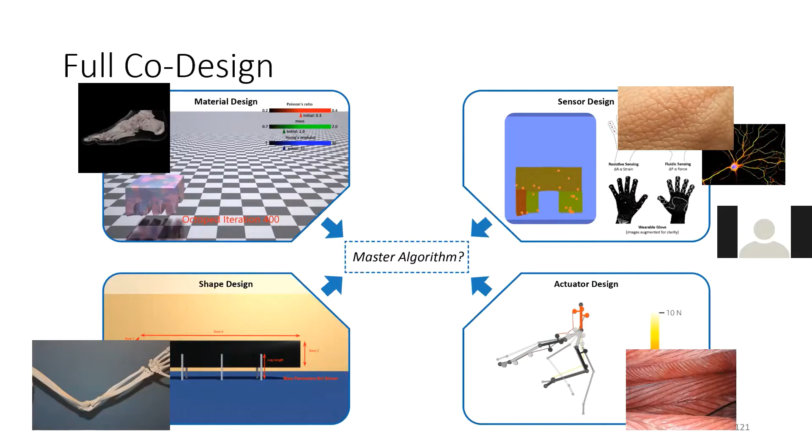Another thing that I think will be really important in the future is sim-to-real for any robot. If you're not familiar with the term, it's the notion that things that work in simulation should actually work in the real world. Even though that should be obvious, it's a really hard problem. In recent years there's been a lot of success, but it's very computationally expensive, and each of these only works on a single robot design.

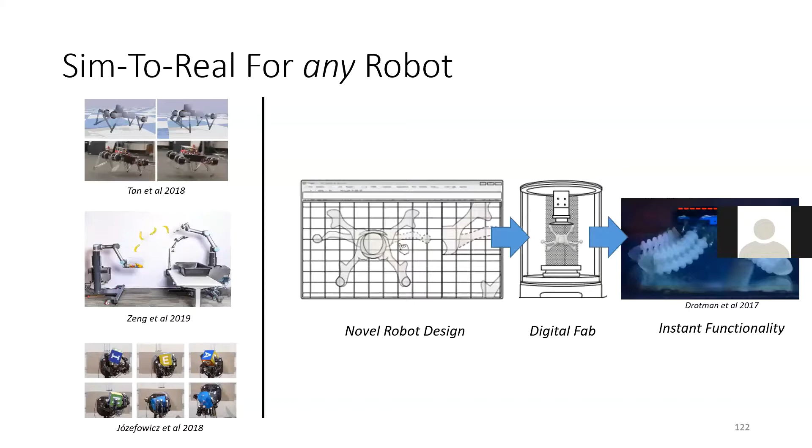People spend many hours trying to solve the sim-to-real gap for a single robot. What I'm really excited about, and think is important in the future, is: if you want to design a new robot, hit print, have it 3D printed, you want it to ideally walk right off the printer in the way it was designed to. So how do we make sure our workflows are predictive for all these crazy novel robots coming out in the future?

I talked a lot about how valuable differentiability was in these problems, mostly for soft robots and rigid robot domains. Differentiable simulators are becoming really popular across many domains right now, but each time they mostly work in a single domain. So not only do we want rich multi-physics engines, like something like COMSOL, but we want to compute gradients with respect to any design parameter in one unified workflow that can capture all the phenomena of rigid, soft, and hybrid robots.

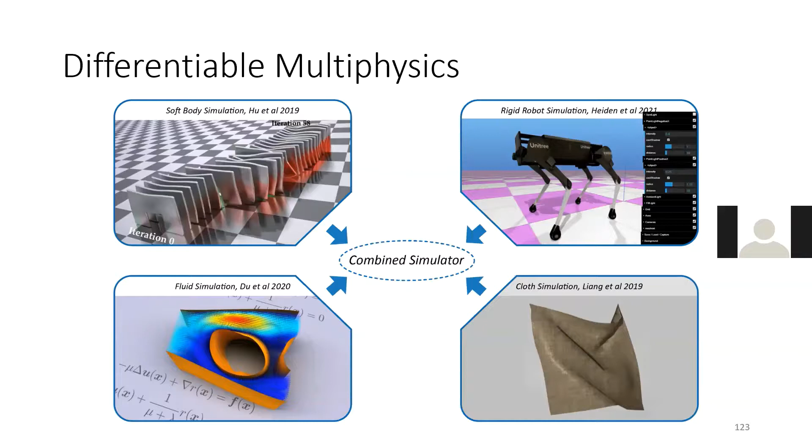And finally, I think it's extremely important that we start thinking about tools for users and not just for researchers. I spent a very long time making research-grade algorithms, and a lot of other people in the field have too, but I'm yet to see these algorithms put into any real software. I think in order to know how useful they are, we need to put them in front of users, get them using these algorithms, see what the impact can really be, and make sure they're catered to users in terms of usability, not just researchers. If we really want this field to thrive, it needs to become useful to somebody in the near future.

All right, that is the end of the technical portion of this talk.

I'd like to end by saying a few thank yous to some people that made this defense possible. First and foremost, I'd like to thank my wonderful, inspiring, supportive, and patient advisors.